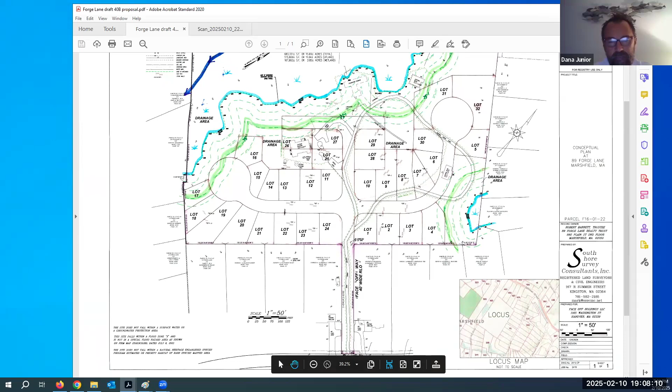Okay, could I ask a question on that? Sure, Dan, go ahead. So I looked at this several years ago and designed a road to go in there. And the problem at the time was, first of all, at Forge Lane, it didn't have enough frontage to make the radii, the right-of-way radii. So that was one thing, but we figured maybe we can get a waiver. But the real problem I had back then was that when you make this road go between the existing houses, one or both of the houses did not have the required 40-foot setback from what would then be a street.

So would they lose their conformity without a side lot line? Right. So is that something that they could possibly get past because of the 40B scenario, or would that still be a stumbling block? Or do you even know? That would be something that they could possibly get around with on a 40B proposal. Right, but not with a standard subdivision proposal. That's been the problem with the site, yes. Right, okay, all right, thank you.

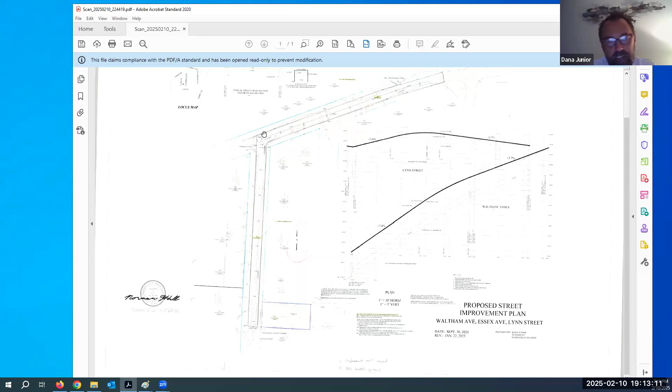So what I would be proposing to do is add catch basins and drainage pipe and manholes in Essex Street, really starting at the junction of Lynn Street, traveling down Essex, and then another set of catch basins and a manhole, and then continue 12-inch RCP pipe all the way down to almost California Street. Yeah, we're going the other way, yeah.

Where the pavement ends now, in that intersection are leaching catch basins already that I think the Clancy's put in some years ago when they did a street improvement for the house right there next door.

As we go up Essex, I'll be paving all that 18 feet wide, plus 1-foot Cape Cod berms on each side, along with the drainage I just explained. That would be essentially the improvement along Essex.

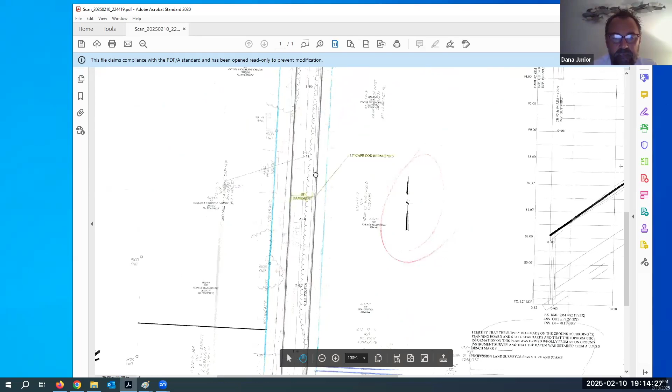Turning onto Lynn Street, again I'd have a set of catch basins right there that feed down to the California Street intersection, all the way down. I'll be paving Lynn Street from Essex about 360 feet, down through the frontage of my lot, which is a 50-foot frontage. My lot's 50 by 100, so I would stop the pavement in front of my lot at the far lot line, at which point there would be 2 catch basins that dump into leaching galleys on the side of the road.

And that's how I take care of the drainage that I've created from paving Essex and Lynn Street. I've also proposed...

From the intersection of Essex Street, where there is a 6-inch AC line, water line, already - so there's a 6-inch AC water line in Essex Street already. Off of that comes a 2-inch line now that I want to change to a 6-inch ductile iron water main off of Essex, all the way down through the frontage of my lot.

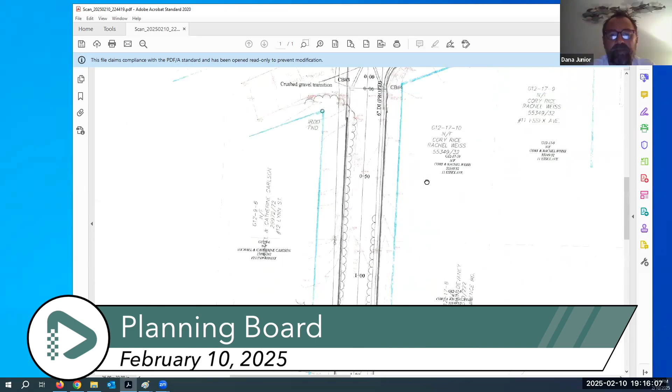I believe I'll be passing 2 existing houses along the way, and I'll be plugging their 1-inch or 3/4-inch services, whatever they have now. I'll be taking it out of the existing 2-inch water main and plugging it into the new 6-inch water main, so those two houses will have a new service off of the new main. Obviously, I'll be doing the same thing for the subject lot for a water line to the new house.

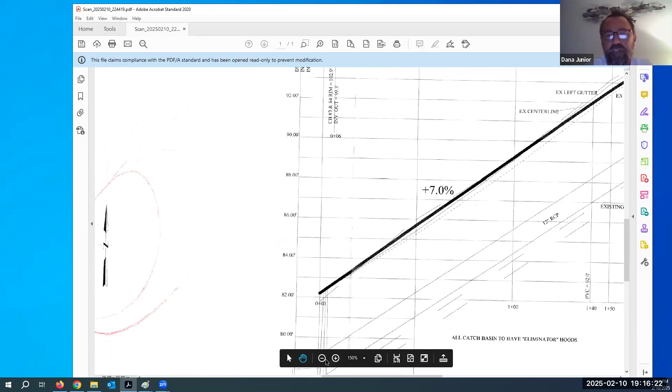The grades along all this really don't change very much at all, they're all within a few inches. So I'm just going to follow the existing dirt grades now. You can see it's a maximum of 7% existing already, so there shouldn't be a whole lot of grading, no significant slopes on each side of the pavement. Everything would be less than a foot, so nothing big up or down off the side of the road.

There's very minimal trees to be cut along this way. I think there's maybe 3 or so on Lynn Street, but there's really not a whole lot of tree cutting along with the grading.

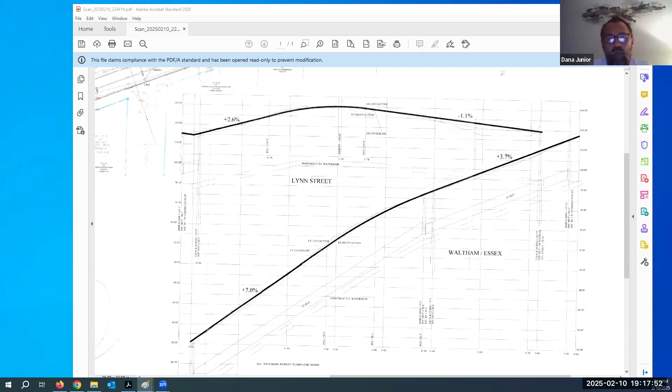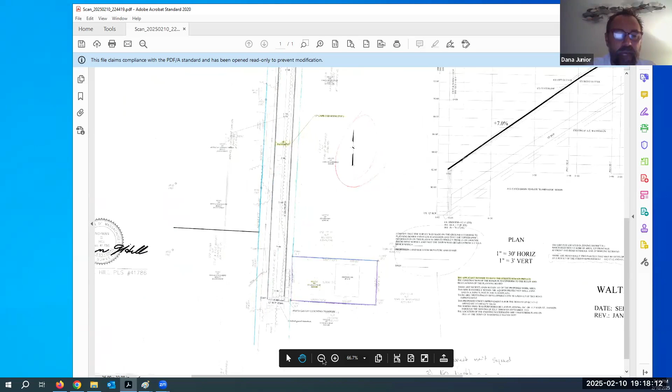One was I need an engineer's stamp on this. Now I had an engineer's stamp on what he was reviewing, but because I did the revised plan, and his name's Jed Hannon who did the PE stamp in the beginning, he hasn't been around. He got back today, but he couldn't get time to put a stamp on this for a PE stamp today. But I can have that for you certainly for the next meeting or subsequent after this.

What you see on the plan is a survey stamp, and that was one of the comments required by Pat upon his first review. So really, as of this updated plan, I need to get a PE stamp on it in order to satisfy all of his comments.

Another comment he had was I might want to check in with the water department to see if they want a hydrant at the end of the street improvement in front of my lot, or more or less in front of my lot. I did ask for the water department's comments some time ago. I just saw today a comment from them saying everything looks good, but we would like a hydrant at the end, and they will provide the hydrant materials for me if I will put it together, which I will.

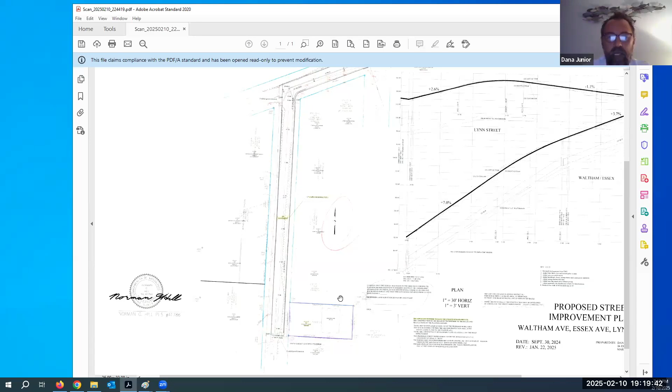So I can show that on the plan if you like. I'm kind of addressing everything at once here, but I also saw Charlie Swanson's comments. I had gone to him prior to submitting this, and I incorporated some of the verbal comments he had as of our meeting a couple months ago.

The additional comments he had today have to do with the existing drainage at the intersection of Waltham and California. He said there are multiple leaching catch basins and a manhole already existing at the end of the previous street improvement where I'm starting. He suggests I look at the drainage infrastructure in that intersection because he says it's been overwhelmed before, and he thinks it might be clogged up - I know it's clogged up. I've looked in them, and there's been sediment coming down Essex into that intersection and filling up the drainage structures. So I could propose to check those and clean out whatever needs to be cleaned out, as far as manholes and catch basins existing now, so that when I plug into it, it doesn't overwhelm the system in that intersection.

So with that, I think what I need to do is three things. I need to put the PE stamp on it. I need to make a note saying I'll check the drainage in that intersection and clean it out if necessary. And I will add the hydrant for the 6-inch water main at the end of the street improvement with the DPW's or the water department's materials.

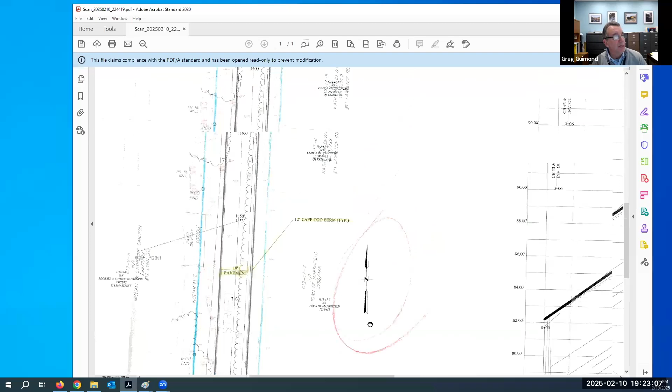The one other thing - Charlie had come in and sent the memo, which Pat and Dana had talked about. But when I was discussing it with Charlie, the one other thing he suggested was perhaps at Lawrence Road, where there are some catch basins that are going to be tied in, and that water would go directly into that other intersection, that perhaps some more leaching galleys would be put in here to intercept some of the water so it doesn't overwhelm California Street and Waltham Ave.

Okay, may I comment on that? Sure, go ahead, Dana. So correct me if I'm wrong, Greg - he came in and spoke with you about that potentially needing to happen, and that was before he sent the email. Right. So all I saw in writing didn't mention anything about that - it just mentioned what I talked about down at the intersection.

And again, correct me if I'm wrong, did he have all the HydroCAD and all the drainage calcs before he made that verbal comment? Because it makes me think he didn't put it in his written comments since he might have seen the drainage calcs and then let that go and focused on the cleaning out. He hadn't seen the drainage calcs yet. Right, he hadn't seen them yet at the time.

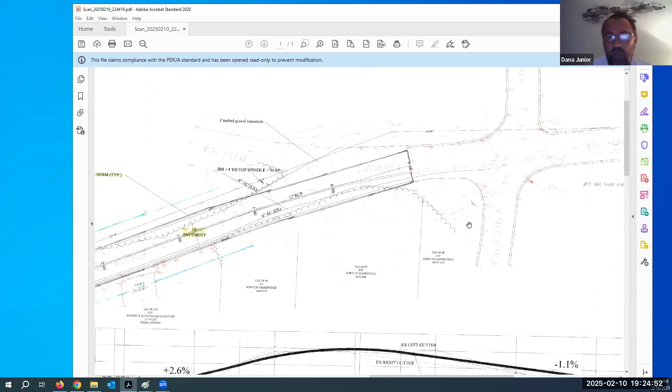So what I'm trying to say is I'm not necessarily going to propose a change to add leaching galleys at that Lawrence Road intersection. I'm going to go down to the intersection below and check those drainage structures and make sure they're clean. Does that sound right? But you may need to put some additional structures depending on the conditions of the ones down at California. Oh, I see. Right, okay.

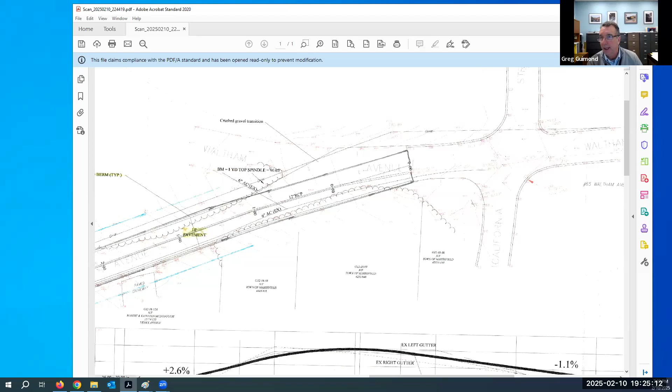Right, so we may be able to look at and fix it, but in case we can't, that's kind of where Charlie was leading to, here's one way we could address it. So, okay, that's not locked in.

That was just so everybody knows. Okay, and then one other comment I saw, he asked a question at the end of his comments about the stone walls and maybe shrubbery that were in the right of way at the end of some of these people's driveways, in particular the Lawrence Road address. I think it shows on the plan.

Yeah, right there, it shows that they have stone walls on each side of their driveway with kind of pillars at the end that I would have to get into. It looks like they protrude right into almost the middle of the street. So I just wanted to call that out to say I'm going to have to mess with someone's structures that are in the right of way in order to get this done.

I'm guessing they might be here, Dana, and we might get to them in a minute. Okay, it's stone walls and some fencing. Right, yeah, yep.

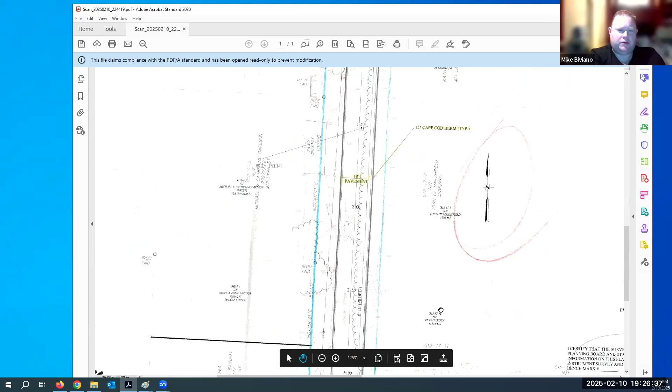That's it for me, Mike. Greg, and I guess Dana, what's proposed for a turnaround at the lot itself? How are we turning around the fire trucks? I hadn't even really addressed that.

I think there's more houses, or at least one more house further down. If you continue down Lynn Street, I think there's a turnaround down there, and it doesn't show on this plan, but I think that's how they do it now. So I just figured leave it alone and have them turn around the same way as that house down there. So Dana, if you move your leaching basins to the other side of the street, you probably could take care of the turnaround on your property.

Well, yeah, it could be, because I'm planning on putting a two-car driveway onto my lot anyway. So that could possibly suffice as a turnaround. Yeah, so I think that should be shown on there if you can get that on the next plan.

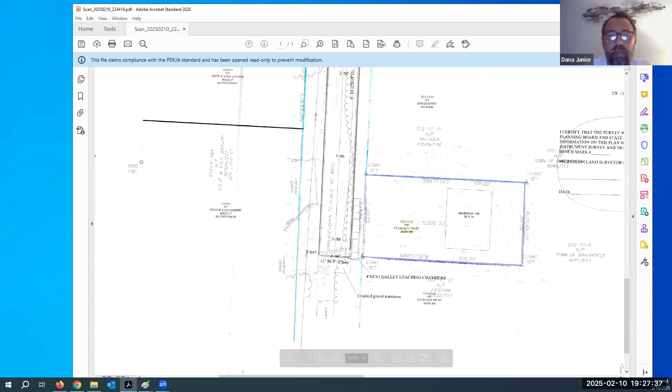Sure, and maybe I'll take a drive up to see what the turnaround looks like at the end of that road. Yeah, if you go just past, I think there's a kind of a big turnaround, not big, but there's another turnaround there.

Greg, is it customary for us to run this by the fire department to see what comments they have? We haven't gotten any comments yet from the fire department. Okay, I sent another email out to them. Okay, so maybe we'll get something back, and Dana, you could update the plan, and if they have an issue with the way it is, at least you'll have something else showing with that hammerhead going there.

Excuse me, I just want to say something quickly, my name is Jessica, hang on one second. Sure, yeah, we'll go to the board next. And you've got PR with a hand up too. Okay, yeah, we'll get to the public, everyone will be heard. Next, I'm going to go to the board - is there any current questions for this plan or suggestions?

All right, seeing none, I will go to the public. If you could either raise your hand or hit the little hand button, I can call you. Let's see, I got PR. Give her name, address please. Kathy LeGros, 11 Lawrence Road, and it has to do with the stone walls.

Those are actually on Essex Street, not on Lawrence Road. But I just want to know how the drainage is going to work at the intersection of Essex and Lawrence Road, because I am concerned that once they pave that, the water's just going to come down this road.

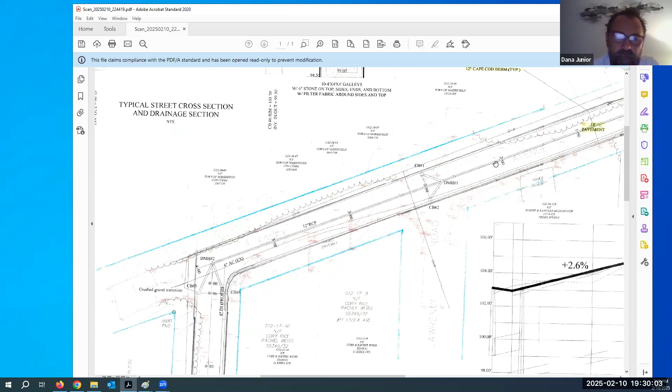What I'm going to have to do is start and stop the berm for at least 20 feet wide so that people can go in and out of that without a bump. And then I can do a gravel transition up there, like I did right there at the end of the street improvement for Essex, and also where it forks up at Waltham and Essex. So I can do the same thing at Lawrence, and again I would have to interrupt the one foot Cape Cod berm in that area.

Is that also where the stone wall is you were talking about? No, I think the stone walls are a little bit further up.

You can see right here, it says pave a little bit. Yeah, right there, right here. So PR, is that your property with the stone walls? No, as I said, the stone walls are Essex Street's, it's 11 Essex Street. I'm at 11 Lawrence, so I have nothing to do with the stone wall.

I'm concerned with getting into Lawrence Road after this is done. The gravel would certainly work, because otherwise we're going to have a bump. But I'm also concerned with drainage as far as water coming into Lawrence Road, because the system gets overwhelmed.

Okay, so Dana, you're gonna show the new gravel there and talk to your engineer about making sure there's no extra runoff getting out of there. Right, okay, correct, yep. All right, PR, is there another question? Because we're gonna have another plan come up about this.

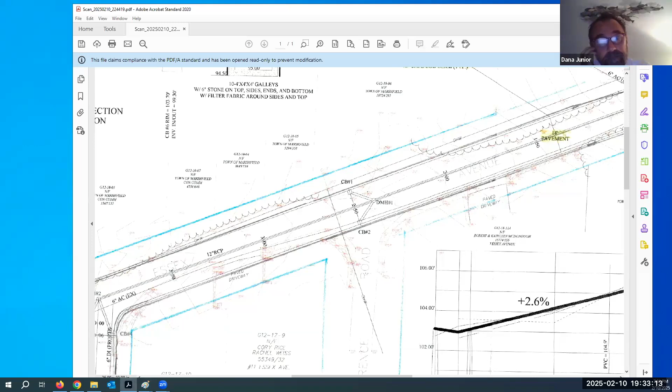All right, thank you. Certainly. Okay, thank you. Next, I saw Jessica. If you would, name and address please. Jessica Breen, 39 Lynn Street.

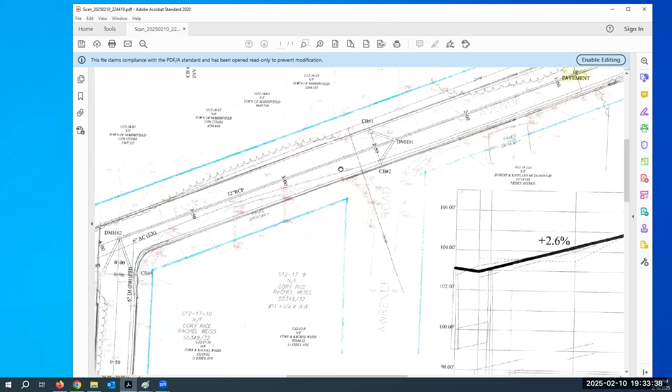So we're the house right past the proposed property. First comment is, yes, there is a T at the end of our property, but it is not accessible. It is not something usable by the fire department. We've actually had them down here and they had to back down the street. Yeah, we're gonna go down and just check that out. I agree with you, I don't think there's much down there, and it's a hill.

It's definitely not feasible. Yeah, we've asked the applicant to put some kind of hammerhead in on the lot so they would be able to turn around there if necessary. Well, that's my other concern, is the size of the lot and how they would be able to do that, because it is, again, a small lot.

We are the abutters on both sides of this, and so my other concern is putting in the drainage. How is that, or what is that impact going to be for the other lots? I don't want to see any sort of detriment happening to our lots as a result of the oversized septic being put on this lot, because again, I understand the land swap. However, a 3-bedroom or 3-bathroom septic on that lot does seem excessive. And what's it going to do to undermine the land around it?

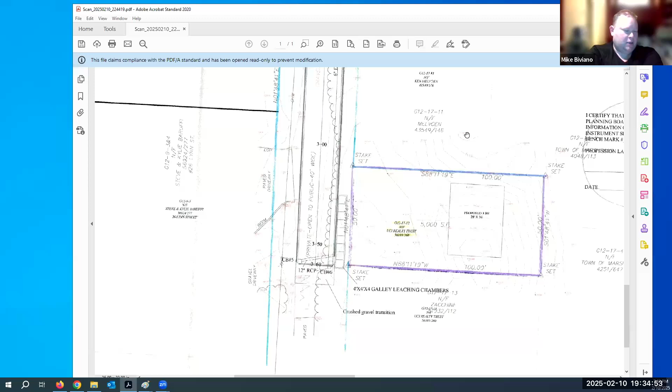So the lot itself, under zoning, is a residential lot of record, so they have rights to build on that small lot, which doesn't conform to our current zoning. So there's nothing we can do about that, he's just grandfathered in for that lot. On the second part, Board of Health has provisions because they need some provisions to allow these to have septic as part of the land swap. So everything he's proposing is totally above board here.

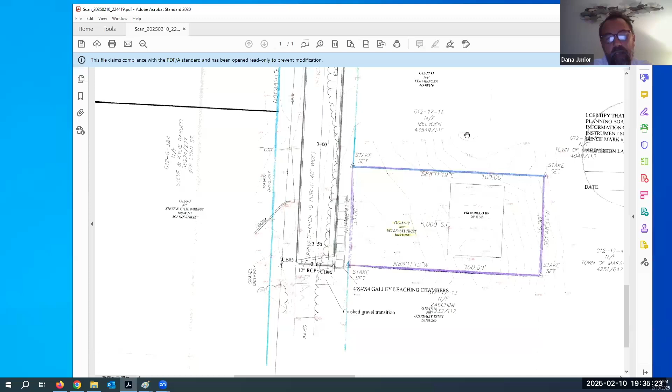Okay, well, we'll be speaking to the Board of Health in regards to that as well. Yeah, he's gonna have to have an application and a hearing there. You haven't had that yet, Dan, have you? No, I put my application in, it's been reviewed, they asked for more documentation, I gave them all that. With all that, it's ready to go to a meeting for them, but I don't have a date for a meeting.